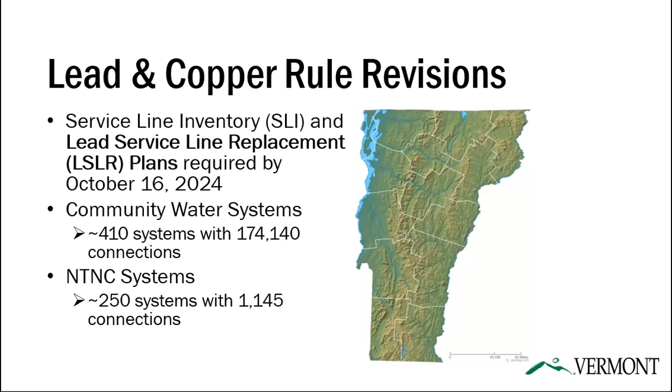We do have strategies to help water systems do this. I'll go over them briefly here. For systems that serve more than 1,000 people and have more than 250 service connections, those water systems are eligible for loans to either pay their in-house staff or hire a consultant or a contractor to complete the inventory for them. These loans are forgivable for the first $100,000, and then above $100,000, there's a low or 0% interest rate. And then additionally, depending on the disadvantaged community status of the water system, there might be more opportunities for forgiveness.

If you want more information about what your water system is eligible for, you can look in the intended use plan that DEC put out last year, or you can contact a project developer at the Water Investment Division to help you with organizing that. The second strategy we have is DEC staff going out to assist water systems directly with their inventories. We started with schools and daycares in the NTNC world, and now we're moving on to nonprofit and government NTNCs.

And then finally, our third strategy to help water systems is with contracted support. We've hired 4 contractors to assist water systems throughout the state. These contracts are funded and managed by DEC. There's no financial contribution required by water systems. They do have to apply for the assistance, and that information went out a few months ago. And we have over 160 water systems signed up for that, but we can take on more.

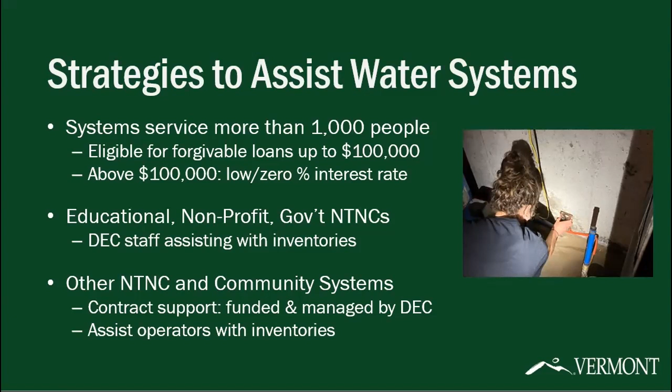So let's go back to some fundamentals about what a service line is. So the EPA defines a service line as the pipe connecting the water main to the interior plumbing in the building. And that is typically in a community water system, the large water main, a connector, sometimes called a gooseneck or a pigtail. And then the service line is after the connector and then goes into the premise plumbing or the internal plumbing and ends at either a meter box or an isolation valve.

The service line can be either completely owned by the water system, completely owned by the property owner, or ownership can be split, sometimes at the property line and at a curb stop or whatever that specific agreement is between the two parties. In EPA definitions, the connector or the gooseneck is not considered part of the service line. So that's some basic terminology about service lines when we're talking about the LCRR.

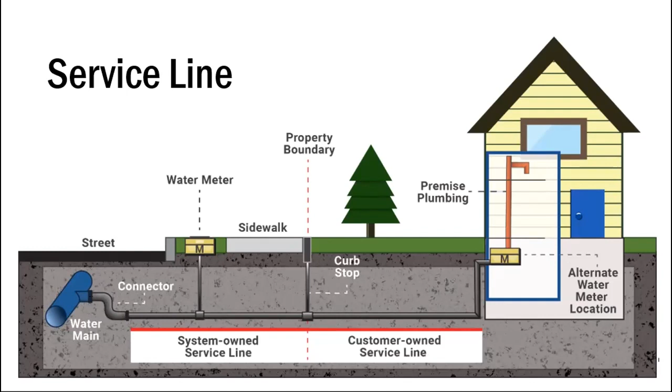And the other thing that I wanted to briefly cover as well is service line inventories. And this is a big picture view at the service line inventory for each property that is served by a water system. This is the type of information that is collected on a service line inventory, from a unique identifier about what property is being inventoried and the supporting details for it. You can provide information about the water main, the system-owned portion of the service line, and then also the customer-owned portion of the service line. And then there's also entries for details about the building itself.

The items that are marked in red or with the asterisks on your screen are the required details that need to be included in a service line inventory. And then the items marked without an asterisk or in the black text are optional details that a water system can catalog as a good asset management technique to put in their inventory, which can help for other tasks in the future.

The two specific properties of a service line are the system-owned service line material, which is marked with a caret here, and then also the customer-owned portion of the service line material marked with the caret here. What material your service line is made out of is what drives the need to have a lead service line replacement plan. So although more data is collected in the inventory, it's those two specific parts of the inventory that may trigger a water system needing to develop the replacement plan.

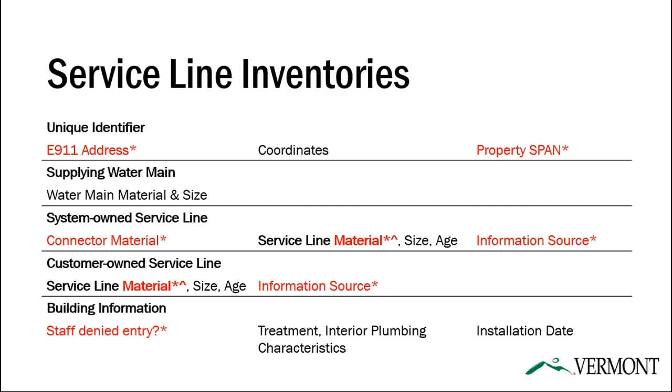And what are those types of materials that might trigger the need for a plan and a notification to the homeowner that they might have a service line that can cause a public health risk? There are three different types of lines. One is that the building system may receive water through a confirmed lead service line. That means either the system-owned or the customer-owned portion of the service line is made out of lead. It's been confirmed that that material is actually lead. The other trigger could be that part of the service line is galvanized, requiring replacement.

Galvanized pipe, through its chemical properties, can build up a scale if it is downstream of a lead pipe. And in some instances, it can be just as bad as having a lead pipe serving your line. So the EPA has identified galvanized requiring replacement service lines as also needing replacement and notification to the property owner or who occupies the house that they have an elevated lead health risk.

And then finally, the third type of service line that drives these additional requirements is a lead status unknown service line. So through a records review, through visual inspection, or other types of techniques, it's just not known in the initial inventory what is the lead status of the service line that's buried under the ground. We don't know if it's lead. We don't know if it's galvanized requiring replacement. We don't know that it's non-lead. And if it is unknown, there is a potential health risk. So the replacement plan is required, and also a notification to the customers that are affected by those lines.

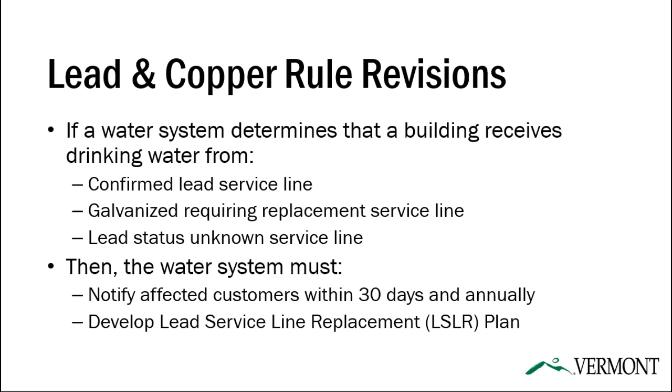And that's what's on the bottom of the slide here, saying that if a customer is served by any of these three types of lines, the water system has to notify them within 30 days, and then also annually, reminding them that the service line is providing water to the property. And then also the water system needs to develop a lead service line replacement plan for the water system. So first, I'll briefly talk about what that notification includes 30 days after the initial service line inventory is accepted by DEC.

Initially, you have to provide that notice within 30 days, and then annually. And then if there's any new customers coming online or starting new service at one of these service lines, the water system is required to also provide that information at the time that the service is started. That notice needs to provide information about the service line material, saying we know that it's lead, we know that it's galvanized requiring replacement, or we don't know what it is. So that needs to be in the notice specifically for that property address.

There also needs to be information about the negative health effects of lead, which is pretty common. It's been out there for a few years about how it can potentially affect intelligence and those that are pregnant or who may become pregnant. So there's a set language about that. The notice also needs to include steps that the customer can take to reduce their exposure to lead, such as flushing procedures, using a filter that is NSF approved. That also needs to be included in the notice.

And then finally, the notice also needs to include opportunities for either service line replacement or opportunities to verify what the material is. So if the service line is made out of lead, or it's galvanized requiring replacement because it has a lot of lead scale built into it, the water system needs to provide notice annually saying there are opportunities to replace this line. Call this number, visit this website. Let's set up a replacement project to get that lead line out of there.

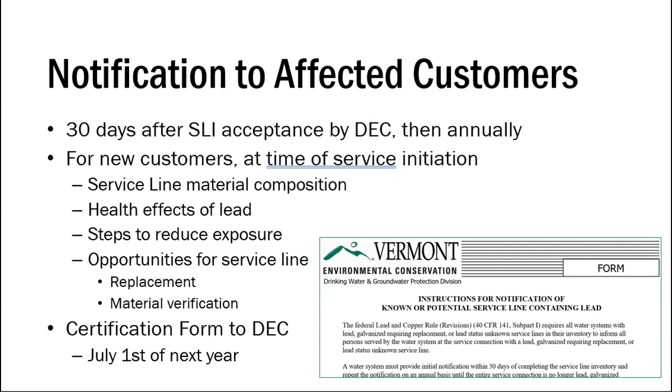DEC has developed a form for water systems to use that has a template for what this notice looks like, as well as a certification form to provide to DEC by July 1st that they provided the proper notifications to affected customers annually. And we provide this form to water systems as they complete their inventory and triggered this need to have this notice. Okay, so that's the notification that's required to affected customers.

Now I'll talk about the replacement plan, which is the second requirement if you have one of these service lines in your water system. And the minimum is one lead service line in the water system. So if your water system has at least one galvanized requiring replacement or one lead service line or one unknown material line, then this entire replacement plan needs to be completed for the water system. It doesn't matter if you've got 10, 15, 100, it's at least one of those trouble service lines that the replacement plan is triggered and needs to be completed.

So the first strategy is not even about replacing service lines. It's about identifying those lines that are still unknown based on your initial records review or your initial outreach to customers, trying to knock on doors, get in the basements, the crawl spaces, the utility rooms to figure out what is a line as it comes into the building.

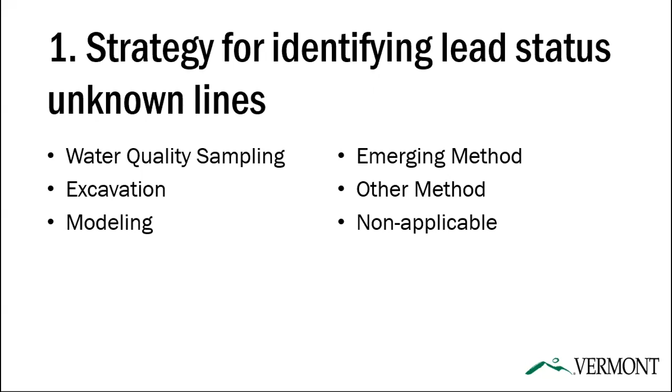And there's a few different strategies that a water system can select in our lead service line replacement plan template of what the water system intends to do to identify what these unknown lines are. And you'll see them on the screen here, and I'll talk a little bit more about each one of what they are. But first, I'll talk about why it's not the best to default to unknowns.

And that's because unknowns, of course, trigger the notification, they trigger the replacement plan, and there's definitely opportunities available right now through assistance through DEC to identify what these unknowns are. But we know that they are going to come up, and there is a plan to how to address them. But unknowns are a big question mark.

A portion of the lead and copper rule revisions is that there are service line replacement goals. And if a water system digs up a service line, trying to replace it, trying to meet their lead service line goal, and it turns out to be plastic or copper, that unknown, which is now revealed to be copper or plastic, will not count as credit towards the replacement goal.

So it's really in a water system's best interest during this initial service line inventory work over the next year and a half to identify what these unknowns are through good records reviews and visual inspections on the property, on the homeowner-owned side of the service line.

Another opportunity that water systems can use to identify an unknown material is noting the installation year of the service line. If there's a record available that shows that after a certain year this service line was put in, then that can be used as justification to say that this line is non-lead. It's not specifically known as copper or PVC, but it is non-lead, if you can identify that the service line was installed after Vermont's enforcement of the lead materials ban in July 1989. So that's another way that we can help get these inventories a little bit more accurate.

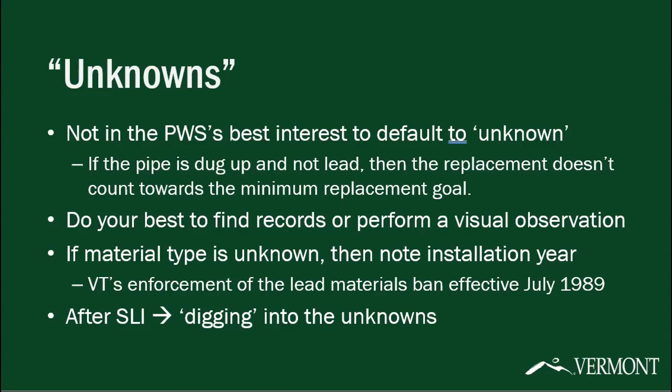So one way you can look into unknowns is water quality sampling. It could be used to identify unknown lines, and it's more like a positive. Like if you get a water quality sample back that shows that there's lead in the line, that proves that it could be a lead line or it needs further investigation.

Water quality sampling isn't as good at taking a service line out of the running, because there's just too much risk or too much chance that you might miss where the service line actually is. And also, corrosion control may mask the presence of lead in the service line, which means the corrosion control is effective and it's working, but it also means that you may not be able to identify a service line through water quality sampling. So it's most helpful to identify a line that is lead.

This is a system-by-system approach. Service lines are different sizes and at different locations, and come in different specifications based on each water system. But it is an opportunity or strategy that you can use to identify unknown service line materials. There's 3 different types of sampling techniques, and I'll just go over what these are if a water system decides they want to use this as a strategy.

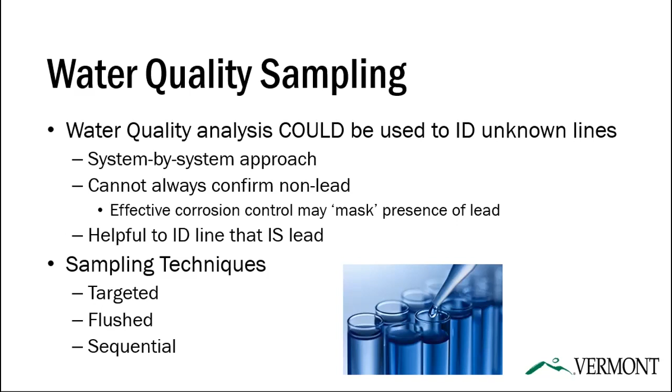So the first one is called targeted service line sampling. This is taking one sample, and the way that the sample is taken is by calculating what the internal premise plumbing volume is, doing some calculations about diameters of pipe, length of pipe, and then after that volume is figured out, the tap is opened somewhere inside the building, the water is flushed out, and then the sample is captured with the best guess that this water started off in the service line, and now it's moved through the plumbing, and now I'm capturing it in the sample bottle.

Some drawbacks to this is that there is additional time that will be taken to measure how big those pipes are, how long they are, to calculate how much volume you need to do that. And that might be a lot of time in somebody's home where you're trying to do this. But it may be enough to capture the sample that you're looking for. So that's called targeted service line sampling.

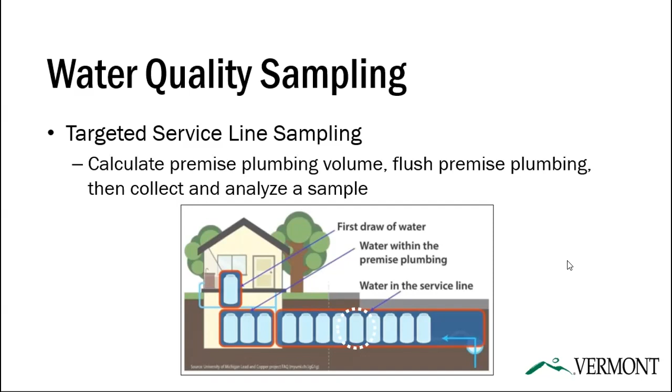Another type of sampling technique is called flush sampling. And this is, instead of calculating a specific flush time or flush volume for each individual home, the sampling strategy has a set flushing time, which may be the best flushing time for a set of homes in a water system. The drawback to this is that if I let the tap run for 2 minutes in one house, I might still be in the premise plumbing, whereas in another house, I might be right in the sweet spot of the service line, but in another home, I might have flushed the entire service line and I'm now capturing water from the main.

So positive is that you don't have to do a lot of calculations and measurements in each home. The drawback is you don't really know where that water is being collected from across every specific property in the service line. So it's a good strategy for an initial screening where you can see what samples come back with elevated lead concentrations, and then maybe you want to focus more on those buildings and prioritize them on identifying unknowns.

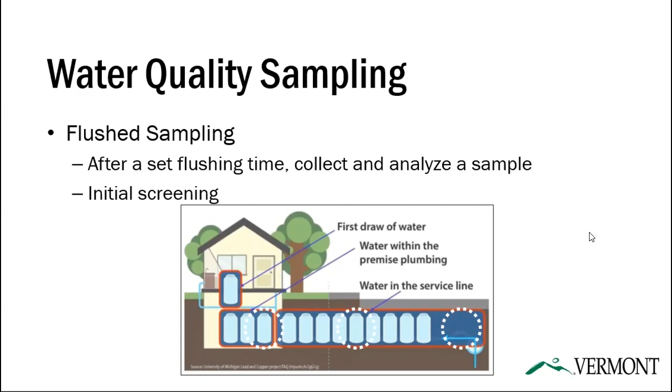The third water quality sampling strategy is called sequential sampling, and this is definitely going to provide you the most accurate or the most detailed information about the service line's lead composition. That's because you're taking multiple samples over the entire premise plumbing and service line, filling up a lot of bottles, putting them all in a box and sending them to the laboratory for analysis. So this is very labor intensive. It definitely takes a lot of time and money to do this, but you will get a more accurate reading for what could possibly be in that service line for that particular property.

Again, the drawback for all these water quality sampling is that it's good for identifying if lead is present, but you might miss something if corrosion control is very effective, masking that there is lead in the actual material. And if you get a negative or zero reading of lead, you can't say there's no lead there. You can say that there is a better chance that there's no lead there. You can't rule it out completely. It's better for identifying that there is a presence of lead. So water quality sampling is just one of the strategies that can be identified in the replacement plan.

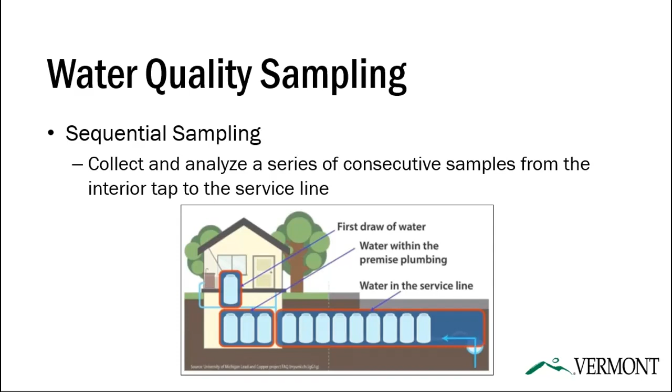The next strategy that could be identified is excavation itself. So removing the earth and visually looking at what is buried under the ground. This technique should not be used during the initial inventory, which focuses on records reviews and then visual inspections inside buildings in basements or crawl spaces without having to actually move earth. And it is a possible step that water systems can do after the initial inventory. There's two subtypes of strategies for this: mechanical digging or trenching using mechanical equipment, and then also vacuum excavation, sometimes called potholing, or using a hydrovac.

One of the drawbacks of this type of excavation is that if you have the hole open and you identify a lead service line or galvanized requiring replacement, the rule currently requires you to remove that lead service line immediately and replace it with a non-lead line. So if this is a technique that a water system is going to do, they need to be prepared to replace those lines while the hole is open. As we all know, construction activities can be very disruptive to a community or to a homeowner. So this technique should really be considered with a lot of thought before it is chosen as a potential strategy for identifying unknowns.

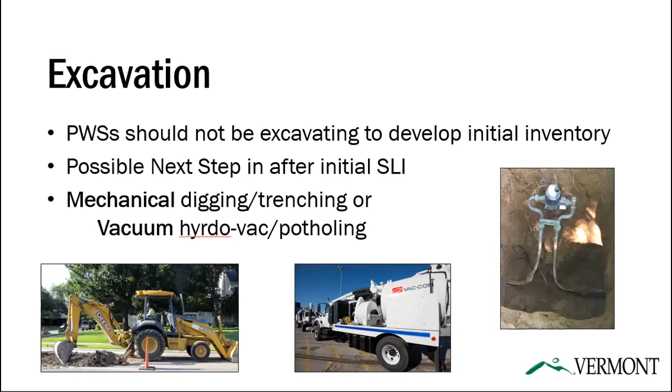Okay, moving on to modeling. Modeling techniques, we really don't think will be that viable in Vermont because a lot of our water systems are small. Modeling techniques use machine learning, probabilities, using a lot of data from other homes and buildings in the area to predict what a particular home with similar construction type or construction year in a city may have, similar lead service line or a copper line.

It's predicting what it thinks that home of a similar build date in that city may have. And so you need a large statistical database, a lot of data points to put that modeling together. And a lot of systems in Vermont just don't have that many connections to make these statistics really worth anything.

So that's predictive modeling. Geostatistical modeling takes it a little bit step forward. They're taking this modeling and plugging it into a GIS, kind of a mapping software, and they're saying construction year in this city on First Street or on Main Street, and it just adds a little bit more accuracy and precision based on space and not just build date in a particular community.

If a water system is interested in pursuing some of these types of techniques, definitely reach out to the division to discuss if you think it is a good technique that you want to use. But we really only think this will be viable for the larger water systems in Vermont if it is a strategy that will be pursued.

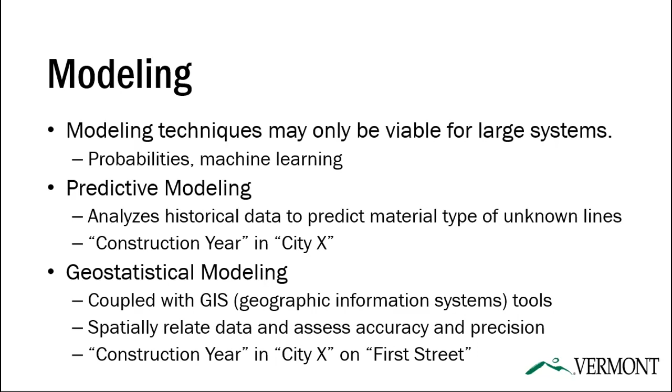Okay, moving on now to emerging and other methods. Emerging and other methods will require DEC review and also our approval if a water system wants to use this as a strategy to identify unknown materials. Some of the emerging methods that are out there are acoustic sensing. Mueller has a product through Echologics that uses sound waves to identify material property.

And another one that's out there on the market is Swordfish through Electroscan, which uses low voltage conductivity probes, and that's what the image on this slide is, to receive information and make a determination on what the material might be based on its electromagnetic properties.

Since these are emerging technologies, there's not a lot of research on them yet. The DEC just wants to make sure it's a good fit for that water system before we approve that in your replacement plan. But we're definitely not saying no to it. We need to know more information before we give it the thumbs up.

And then finally, the other option that may be chosen as a strategy to identify unknown service lines are called other methods. And this could be less technologically based methods, more of the people-to-people type of methods, such as public outreach or customer engagement.

This could be, for example, if you have your initial service line inventory and you've knocked on doors, you've handed out flyers, but people just aren't opening their homes to let a technician check out the customer-owned side of the service line, and you just don't know if it's copper, lead, or plastic. This could be another method to try to increase customer engagement.

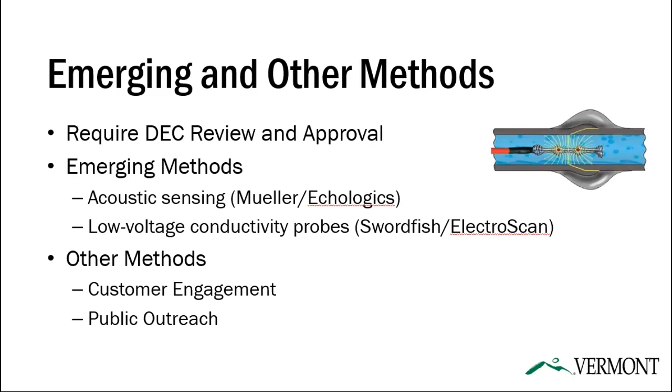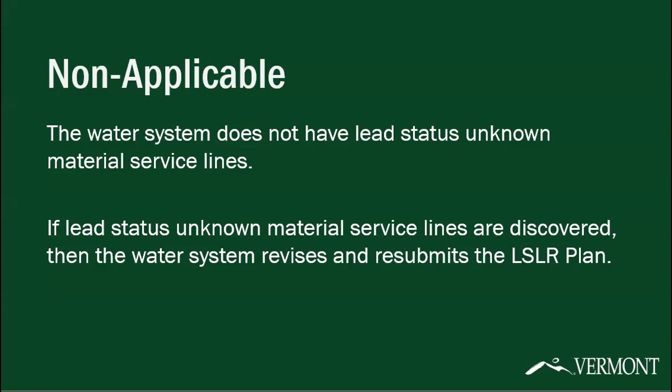And then the final option, of course, is the non-applicable option. We understand that some of these inventories might come back with no unknowns. They might just have lead or galvanized requiring replacement pipes. And if you have no unknowns, then a strategy to identify your unknowns is not applicable. However, if in the future you identify an unknown line, then this portion of the plan would have to be revised. All right, so that is strategies for identifying unknowns.

We'll move on to the second section of the plan, which is procedures for conducting full lead line replacement. So this is a portion of the plan where the water system will type in what their procedure is for conducting a full lead line replacement project. Because each water system is unique, we don't provide specific procedure for adoption for this. But there are 4 key things that we are looking for when we review replacement plans.

The first one is the labor force: will it be done by water system staff, or will contractors be hired to do the replacement project? The second is acquiring necessary permits. Are there any local municipal permits that need to be acquired? Will a WW permit be required? A permit to construct if it's part of a larger drinking water infrastructure project? What types of permits would be required for a replacement project?

The third is acquiring property owner permissions. Of course, if it is a customer-owned portion of the service line, what is the water system's procedure for getting that documentation if it is required?

And then finally, we're looking for how will the water system update its service line inventory? And this is the who, when, how that would be accomplished. Because inventories are a living document. They're meant to be updated as you discover new information or you replace lines. What is the procedure that the water system will use to do that?

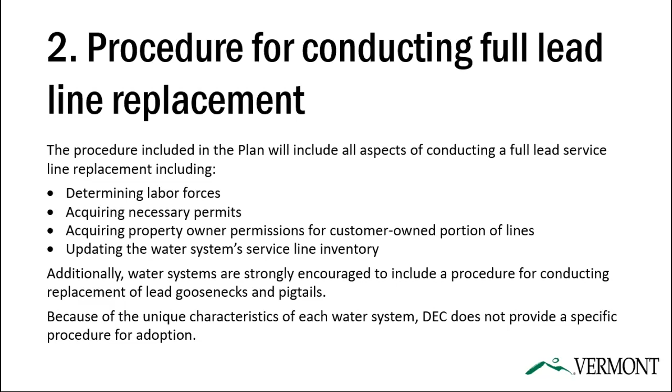And then there's some additional things that are strongly recommended, such as what are the procedures for replacing goosenecks, in addition to full lead line replacement. To talk a little bit more about the differences between full lead line replacement and partial lead line, I have a few slides here that show what those are.

When we say full lead lines, some people might visualize I've got the customer and the system-owned portion of the service line, they're both lead, and I'm replacing both portions. Yes, that is full lead line replacement, but there are other types of replacements that are considered full lead line replacement under the rule. An example of that is if the system owns a copper line and the customer owns the lead line for their portion, and you replace the lead portion of that, that is a full lead service line replacement because you fully removed the lead from the service line.

Another thing is you flip that, the system owns lead, the customer has PVC, you remove just the lead, and now that's a full lead line replacement. You don't have to actually remove the entire line if a portion of the line is non-lead. The only thing where this gets a little complicated is when you have galvanized requiring replacement. The line itself is galvanized, but it might have that lead scale built into it. Then you would have lead and galvanized, removing both of those. Or if you just have galvanized requiring replacement on one portion of it, that's considered a full lead line replacement.

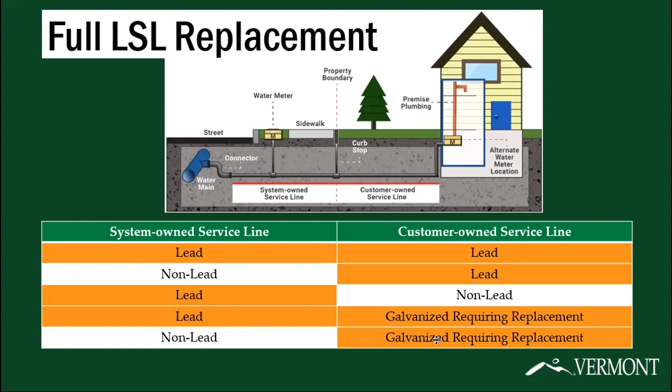This is important because it meets any replacement goals that are required under the rule, and also federal funds for replacement projects are only eligible for full lead line replacement projects. A partial lead service line replacement is not eligible for federal funds. On the next slide here, I have some examples of what partial lead service lines would be categorized as. That's when you have lead going into lead and you only replace half of it, or you have unknown going into galvanized requiring replacement and you only replace the galvanized, you still have the unknown portion.

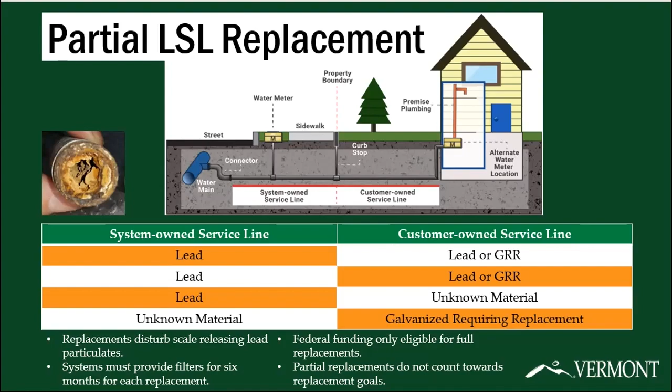Okay. Next, moving on to strategies to inform the customers for the lead service line. This is about educating the customers before it happens, whether it's a full or a partial lead service line replacement project. The strategy can come in a lot of different forms, but what's required to be in that information is flushing procedures, information about and instructions of how to use the filter or point of use device, which the water system is required to provide for 6 months after a replacement project. The water system needs to educate the customer that they may get a follow-up tap sample 3 to 6 months after the replacement to make sure that there's lower levels of lead in their drinking water.

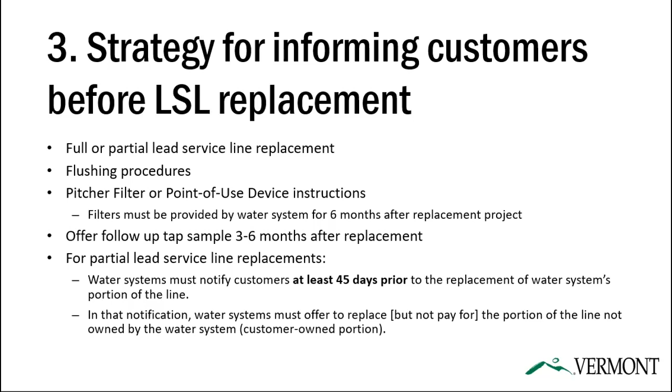And then for partial lead service line projects, the water system is required to notify customers 45 days in advance and offer an opportunity for the customer to also replace their portion of the service line at the same time, which is the most effective way of doing it. So the strategy that needs to be included in the replacement plan is how this information is going to be provided to the customers. And in the plan, it needs to be selected. You're going to use media outreach, or you're going to use US mail, emails if you have those for your customers. If you select another method that's not one of the pre-populated ones, then you can discuss that with the division. Get approval for that other method if it's not listed there.

All right, so moving on to, and then finally some sample materials are available if you want to develop what your outreach letter or notification could look like. There's some free sample materials from the American Water Works Association at this guide that they have at that URL.

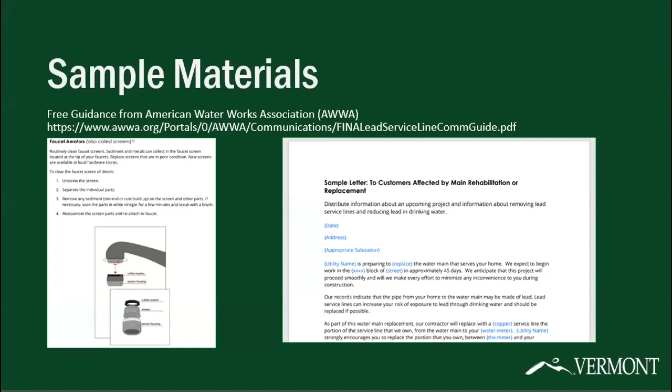All right, moving on to section 4. The middle of the plan is the replacement goal rate. I've been mentioning the lead trigger level, which is 10 parts per billion. That's if a water system collects lead samples and they're above 10 ppb. Then there's a requirement that they start replacement projects across the water system. For systems that serve more than 10,000 people, they have to input a goal rate of what that is.

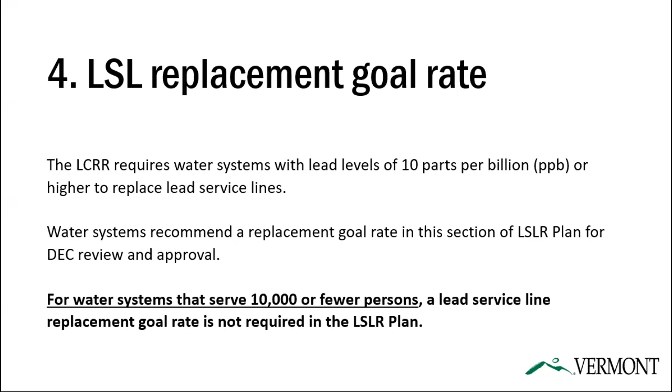But for most systems in Vermont, they don't have to put in what a goal rate is. They can if they want to. The replacement plan doesn't require that. So that's an option for water systems that are small. They can just say goal not required. Otherwise, the goal replacement rate is described in the regulation.

And then moving on to section 5, this is a procedure for customers to flush service line and premise plumbing of particulate lead after a replacement project. DEC has written this procedure for all Vermont water systems, standardizing it across the state. And of course, if possible, this procedure should be provided to customers in advance of the project using that information delivery strategy that was identified in section 3.

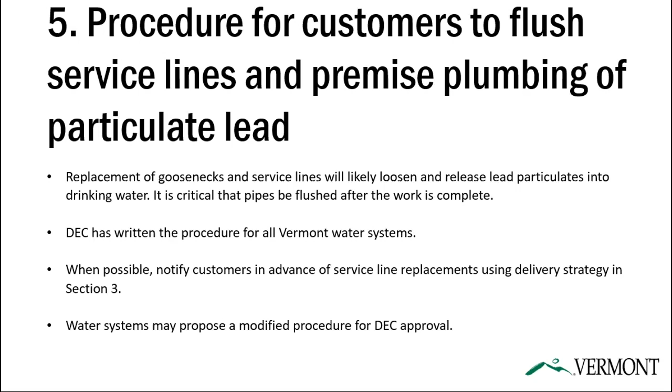And then there's a recommended procedure that customers repeat this flushing every 2 weeks for 3 months to make sure any settled particles get flushed out of their internal plumbing. And then, of course, following that up with an actual sample 3 to 6 months after the replacement project.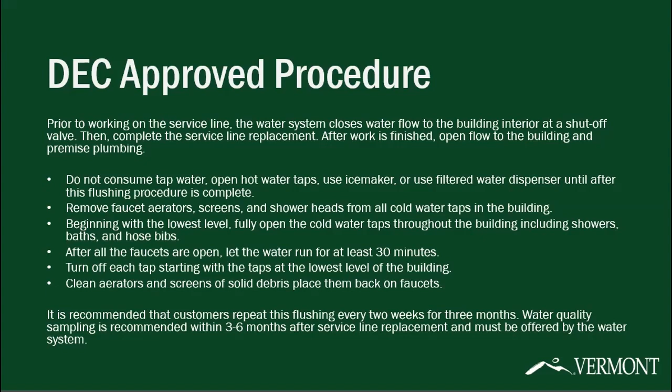All right, moving through the replacement project here, we move on to section 6, which is the prioritization strategy for lead service line replacement. And this is prioritization within a water system. Some water systems might have 2 or 3 lead service lines that need to be replaced if it's a real small system, but some larger systems might have dozens or hundreds that need to be replaced. And DEC is providing a strategy for all water systems to use to help prioritize how to tackle these replacement projects based on limited funding and limited time.

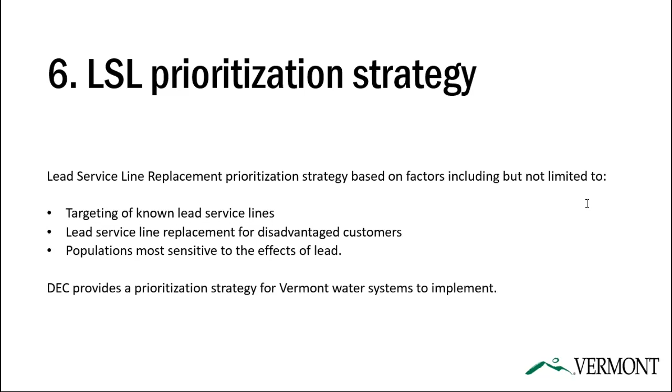We have a short construction season in Vermont to tackle those, so we are affecting known lead service lines and positively affecting disadvantaged customers first over other types of populations or other types of buildings. So it uses a points-based strategy where a known lead service line gets 10 points. A property that serves, such as a school or a daycare, would get 10 points. And based on each particular project, you can gather priority points and then develop a strategy as a water system about what should be tackled first.

A few different scenarios here. If you have a service line that provides drinking water to an elementary school, you know that the service line is lead and that elementary school is in a disadvantaged community, that would be 10 plus 10 plus 10. That's 30 points. And that would be a high priority project to make sure we're addressing lead that might affect young age children in a disadvantaged community. And we know that line is made out of lead.

In comparison, if you have a known lead line that provides water to an office complex or an office building, that would only score 10 points because there's no disadvantaged or highly sensitive customers at that. So looking across all the projects that water system may need to accomplish, they should prioritize the service line to the school versus the service line to an office building. So this is a strategy that is included in Vermont's lead service line replacement plan template. And there's more information about this in our guidance document if you want more scenarios to look into.

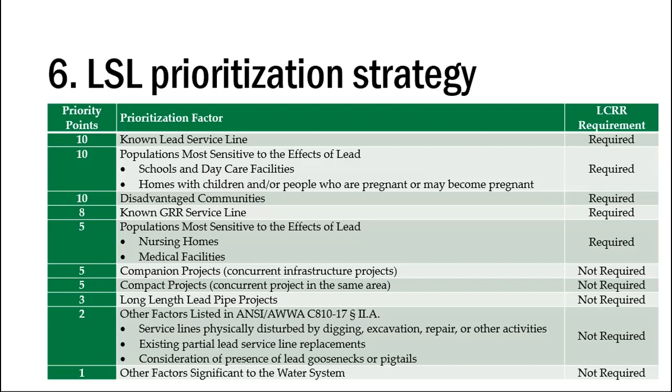All right, moving on to section 7, which is about the money, the funding strategy for conducting replacement projects. We've mentioned a little bit throughout the hour that there is federal funding available through the bipartisan infrastructure law. That money is available until 2027 and is flowed into the state's drinking water state revolving funds. There's a separate pot of money just for lead service line replacement projects. More information about that type of funding and other types of federal funding are at this EPA website.

There's also funding available from the USDA Rural Development Program and other types of sources where you can use federal funds to conduct replacement projects. The plan itself needs to talk about what the water system's strategy is to acquire funds to do this.

If you're going to use loans, what type of loans will you be using? Grants, what type of grant program? Will the water system raise rates to generate funds for these projects? Or will they try to get municipal bonds to do that? So that needs to be included about how the funds will be gathered to do replacement projects.

And then the second part required under the regulation is for customers who are unable to replace their portion of the service line that they own, what is the water system's plan to assist these customers? Are there perhaps liens or 0% interest loans, any refunds, tax rebates, increase in rates? There are a lot of different strategies to obtain customer acceptance for their portion of the service line.

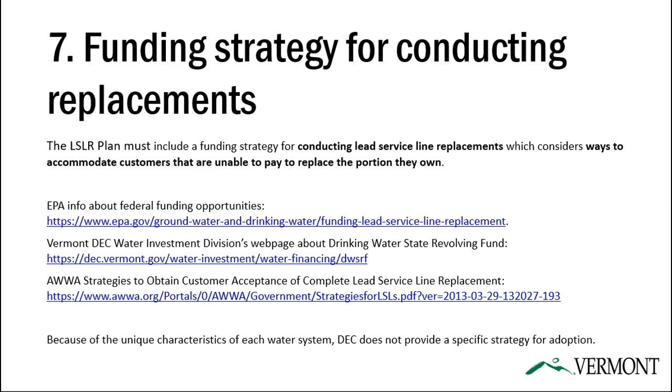How will the water system pay for these replacement projects? And how will they accommodate customers that are unable to pay for the portion that they may own? There's many different ways that that can be accomplished. So those are the 7 sections required in the replacement plan as LCRR currently spells it out.

Again, just to review, it kind of starts in the beginning with what are the unknowns? What do you have that you don't know? And how do you propose to identify those unknowns? Going through the replacement project, identifying how you're going to do that with what labor forces, how you're going to let the customers know that this is happening, and then closing out with how do you prioritize which projects come first and how do you pay for those projects.

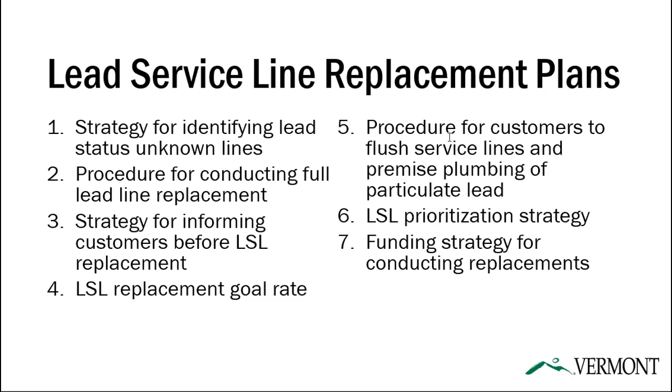These are the 7 required sections for the replacement plan, and we have different guidance beyond this training on our webpage to help you walk through what we're expecting to fill in the template for these projects. So those templates that I mentioned are available on the division's webpage.

If you go to dec.vermont.gov/water and click on the service line inventory widget at the top of the page, that will bring you to the Lead and Copper Rule Revisions webpage, where we have information about replacement plans, as well as inventories if you're still completing your inventory or looking for assistance on your inventory. And there's also other training and guidance documents there.

I do encourage folks, if you do have to do a replacement plan, to check out the template, which is a PDF that is fillable and then submittable on A&R Online. And then there's also a companion document called the Guidance on Lead Service Line Replacement Plans, which walks you through each section, just similar to how this training walked through each section.

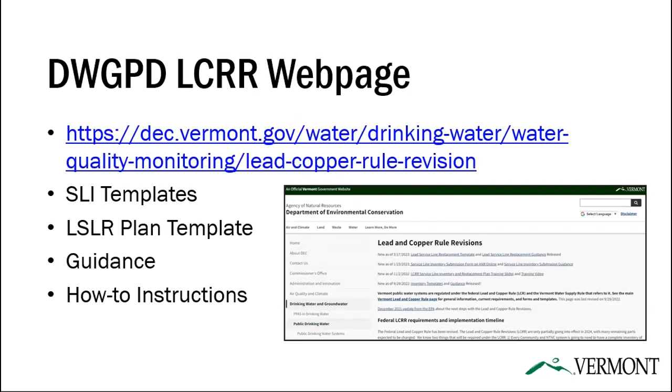Then that webpage also has information. Oh, I already mentioned these. It also has how-to instructions on how to complete those requirements from the LCRR. And then finally, just some helpful tips about how to submit these documents on A&R Online. There is a button on A&R Online called Form Finder.

So if you click that blue button and then start typing in replacement plan, some blue and yellow text will show up saying Lead Service Line Replacement Plan Submission Form. You click on that and it will prompt you on how to upload your PDF Adobe document of the service line replacement plan. And then the additional requirement is that water systems need to submit a cover letter that's signed by a water system representative saying that we agree to implement this plan, and this is what we're submitting.

So those are the 2 requirements that need to be accomplished by October 16th of 2024 if a replacement plan is required for that water system. So that's what we wanted to cover in the last hour. A brief understanding of the LCRR, the strategies that our department is using to assist water systems meeting the inventory and the replacement plan requirements. And then we went really into the 7 sections of the replacement plan and some tips that are available on our website to accomplish this.